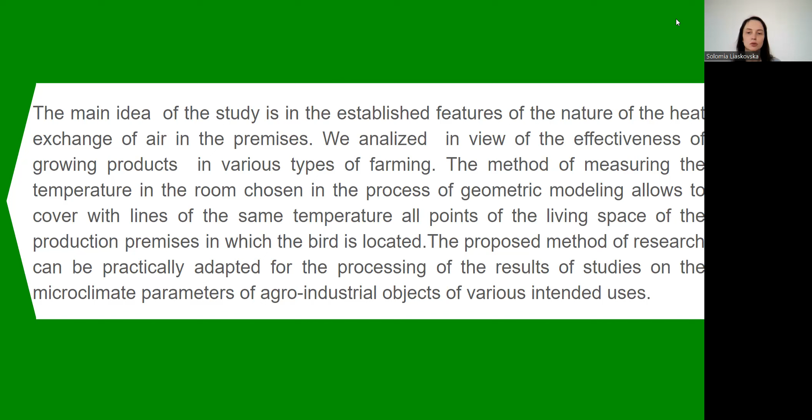The proposed method of research can be practically adapted for the processing of the results of studying the microclimate parameters of agro-industrial objects of various intended use. Heaters and ventilation systems are used to provide regulatory requirements. Their effective work is possible when rational modes of operation of the corresponding technological equipment are used.

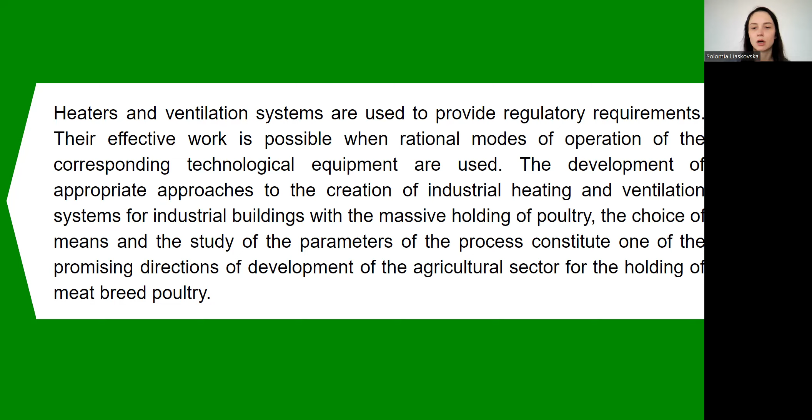The development of appropriate approaches to the creation of industrial heating and ventilation systems for industrial buildings with the massive holding of poultry, the choice of means and the study of the parameters of the process constitute a promising direction of development of the agriculture sector for the holding of meat breed poultry. The finding of the peculiarities of resource support for the technological process of poultry breeding.

The aim of the study is to find out, on the basis of the project approach, the main components of the project on the research of the microclimate of industrial premises to substantiate, develop, and apply means of geometrical analysis of the graphic dependencies of these parameters. The process realization of research has been carried out on the example of determining the amount of heat utilized from the premises by the work of local supply and exhaust ventilation.

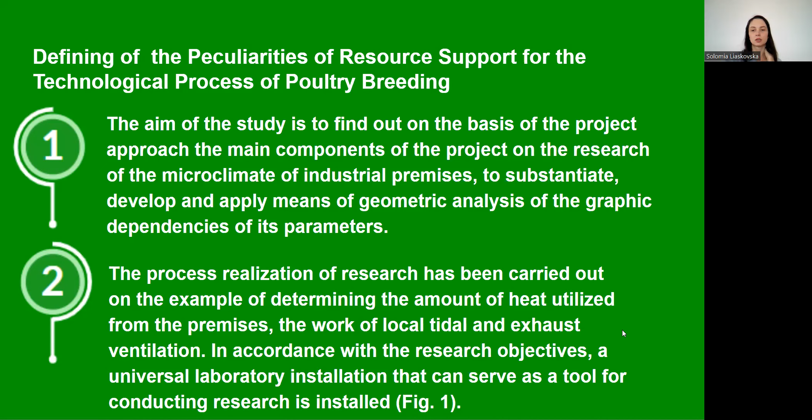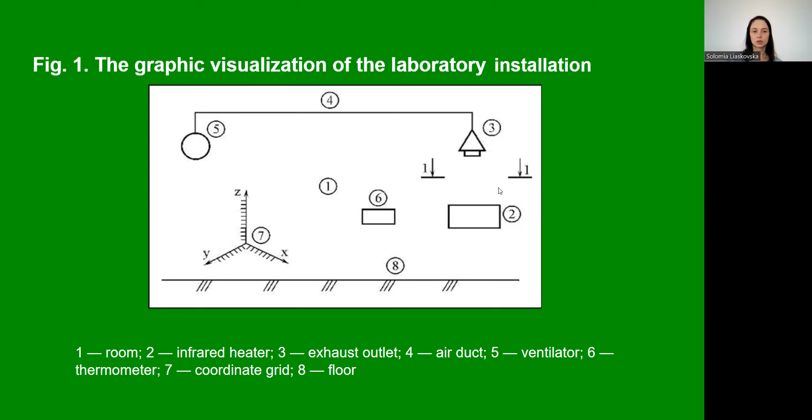In accordance with the research objectives, a universal laboratory installation that can serve as a tool for conducting research is installed. We can see it in Figure 1, the graphic visualization of the laboratory installation. So 1 is a room, 2 is infrared heater, 3 exhaust outlet, 4 air duct, 5 ventilator, 6 thermometer, 7 coordinate grid, 8 floor.

The work of local ventilation, the temperature field in the room space: 2 infrared heater, 3 exhaust outlet, 4 air duct, 5 ventilator, 6 thermometer, 7 coordinate grid, 8 floor. The temperature of the air we can measure with the thermometer 6 and use of the coordinate meter 7. When studying the work of local exhaust ventilation, the temperature fields in the room space 1 are compared with the ventilator 5 switched off and on.

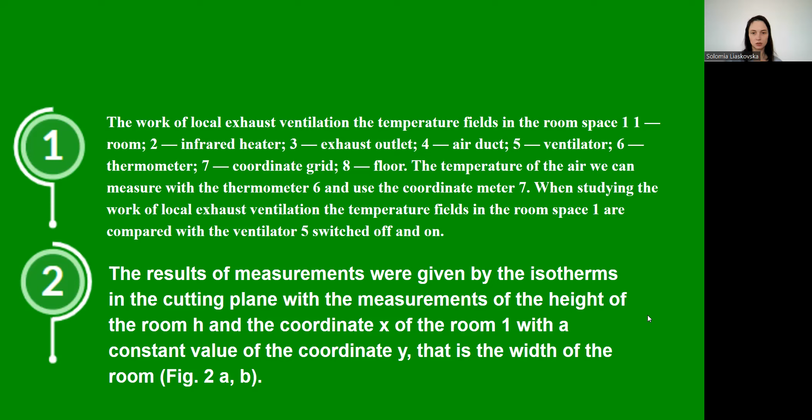The results of measurements were given by isotherms in the cutting plane with the measurements of height of the room H and the coordinate x of the room 1 with the constant value of the coordinate y, that is the width of the room. So we can see in Figure 2 the isotherms of the cutting plane. The comparative analysis of the insulation isotherms experimental results.

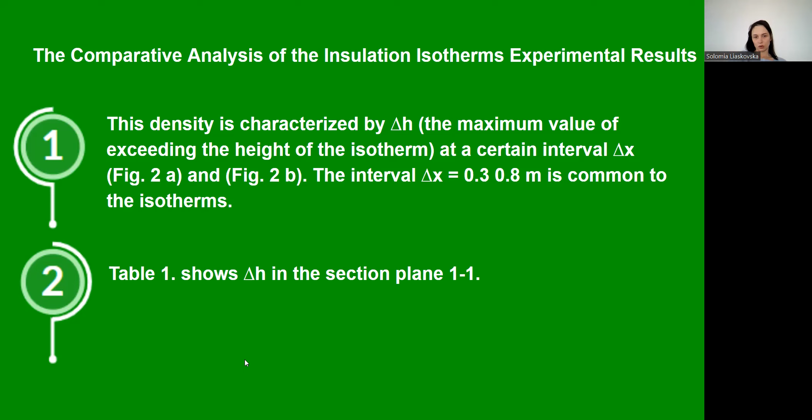The density is characterized by delta H, the maximum value of the height of the isotherms at a certain interval delta X, Figure 2a and Figure 2b. The interval delta X equals 0.3, 0.8 is common to isotherms. Table 1 shows delta H in the section plane 1-1. So here we can see the value of the slope of isotherms delta H.

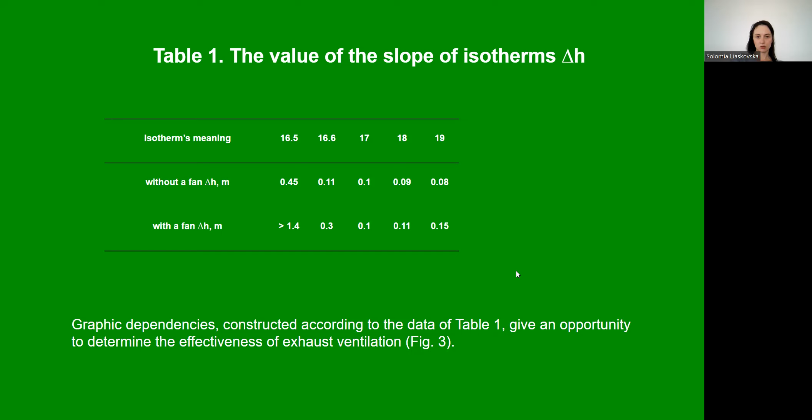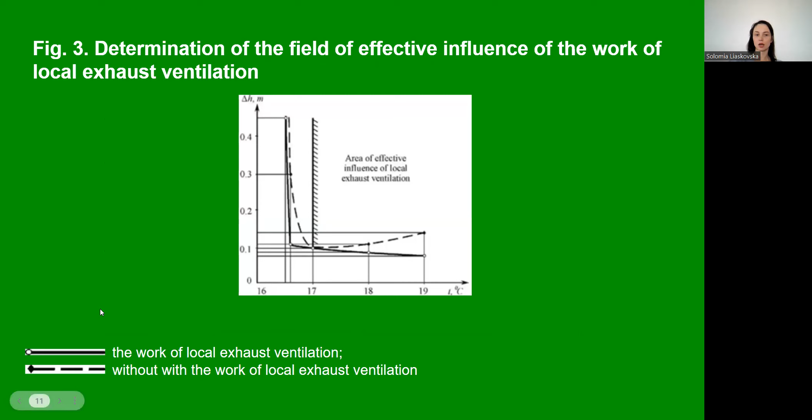Graphic dependencies constructed according to the data of table 1 give an opportunity to determine the effectiveness of exhaust ventilation. Figure 3, determination of the field of effective influence of the work of local exhaust ventilation. So here we can see the graphic dependencies and also the meaning of each type of line. So first type is with the work of local exhaust ventilation, and second type without the work of local exhaust ventilation.

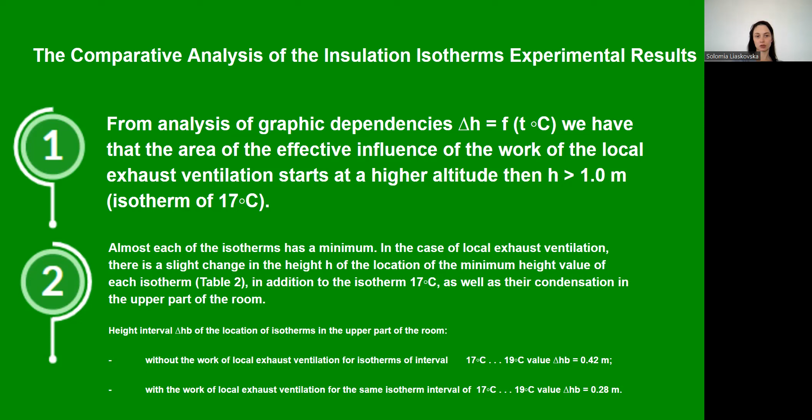In this case of local exhaust ventilation, there is a slight change in the height H of the location of the minimum height value of each isotherm, in addition to the isotherms, as well as their condensation in the upper part of the room. Table 2 shows us minimum height values of the isotherms' location.

So height interval delta HB of the location of the isotherms in the lower part of the room without the work of local exhaust ventilation for the isotherms is interval 0 till 16.7, and with the work of local exhaust ventilation for the same isotherms interval 0 till 16.8 value delta H.

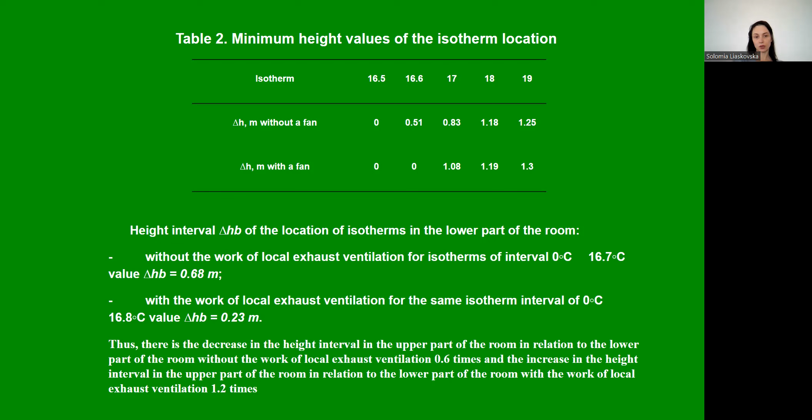Processing results by geometric methods using complex drawing. The research methodology consists in the deeper and more thorough use of geometric modeling tools in the process of analyzing the results of experimental research through an effective project approach to the implementation of the described stages of research.

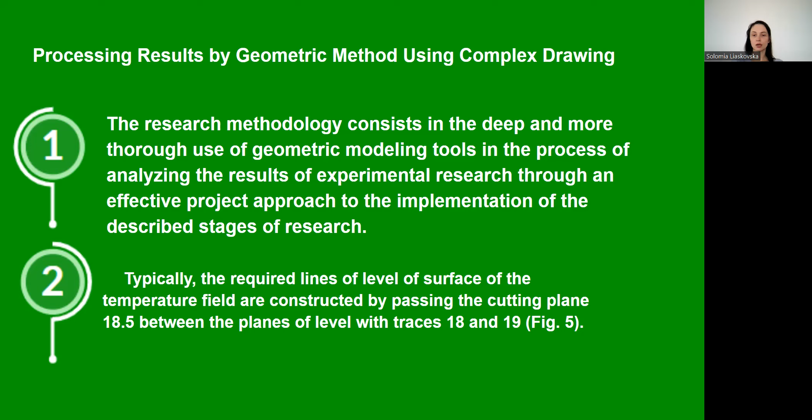Typically, the required lines of level of surface of the temperature field are constructed by passing the cutting plane 18.5 between the planes of level with traces 18 and 19. Figure 5. Let's construct projection of the point of the temperature field with the value of temperature. For example, we can have temperature equals 18.7 and x equals 0.3 meter.

The construction is carried out in the following sequence. First, we conduct a trace of the cutting plane. Then we conduct a projection link line at x equals 0.3 meters perpendicular to the axis OX. At the intersection of both lines, we obtain point T1, which is a horizontal projection of the temperature value on the surface of the temperature field.

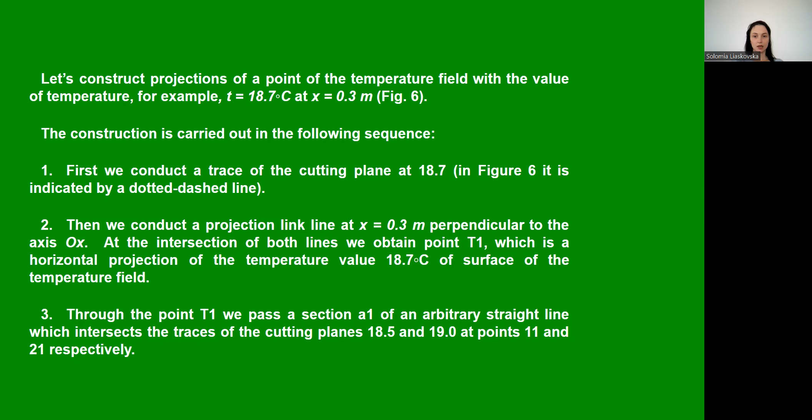Through the point T1, we pass the section A1 of an arbitrary straight line which intersects the traces of the cutting planes at points 11 and 21 respectively. Their projections 12 and 22 are found in the isotherms 18.5 and 19.0 respectively. Point T2 of the intersection of the projection lines and section A2 is the required point of the temperature field surface with a temperature value of 18.7.

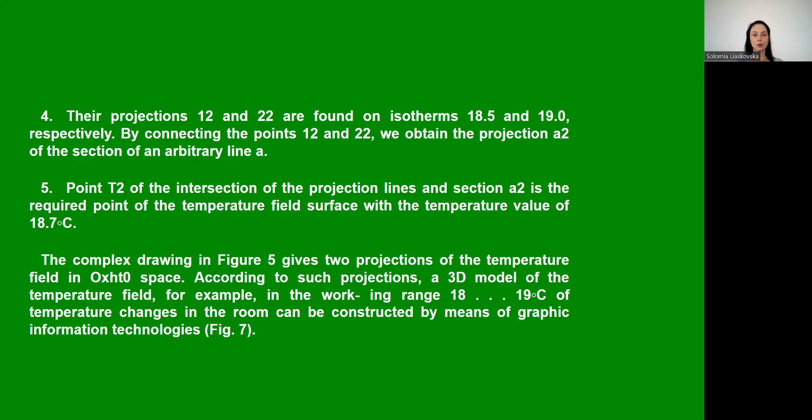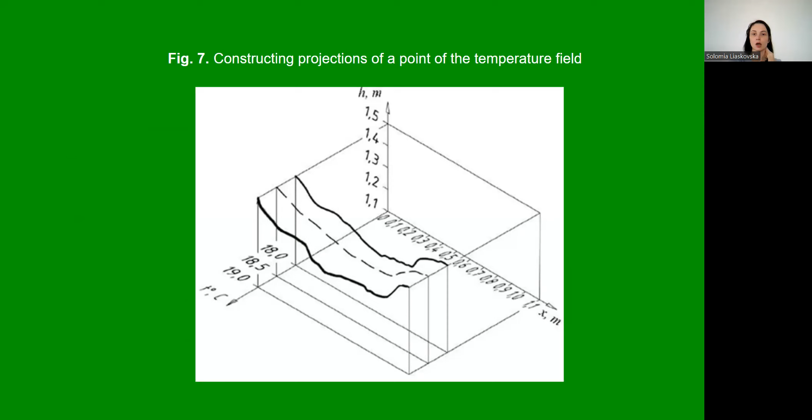The complex drawing in figure 5 gives two projections of the temperature field in OXHT0 space. According to such projections, a 3D model of the temperature field, for example, the working range 18 till 19 of temperature changes in the room, can be constructed by means of graphical information technology. So we can see figure 7, construction projection of a point of the temperature field.

So summary of our research. We analyzed that the involvement of geometric modeling allows to effectively study the parameters of the microclimate of industrial buildings; an example of the technological process of poultry breeding is considered. The geometric methods of processing experimental parameters have been implemented.

Quantities that are difficult or impossible to determine under experimental conditions were also investigated. The obtained scientific results demonstrate the use of geometric modeling using multidimensional geometry. These methods will allow the research of the agro-industrial complex for various purposes.